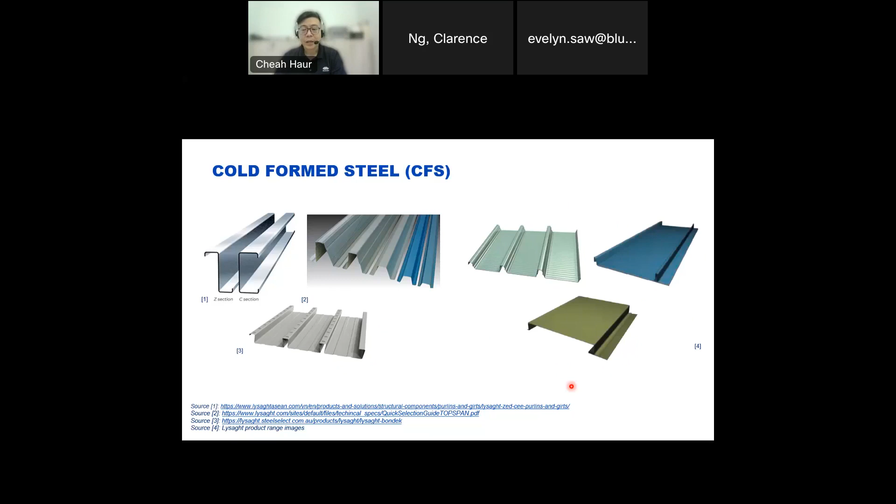On the right-hand side are the cladding products, or what we normally call architectural products. The steel thickness may range from 0.42 mm to about 0.6 mm. Our focus for today is mainly on the architectural products. Commonly, cold form steel is fabricated by the roll forming process in the industry now, because it is the most productive method.

Roll forming is the shaping of the steel coil in the cold state to manufacture long length products, normally done by roll formers in the market. The coil is unwound and passed through a number of pairs of mating profile rollers. Each roller is designed to progressively develop the profile in predetermined increments, gradually bending the flat steel into a certain profile. As shown in the illustration, the coil or flat sheet is fed into a series of rollers, and each roller takes part in bending the steel sheet to the designed profile shape.

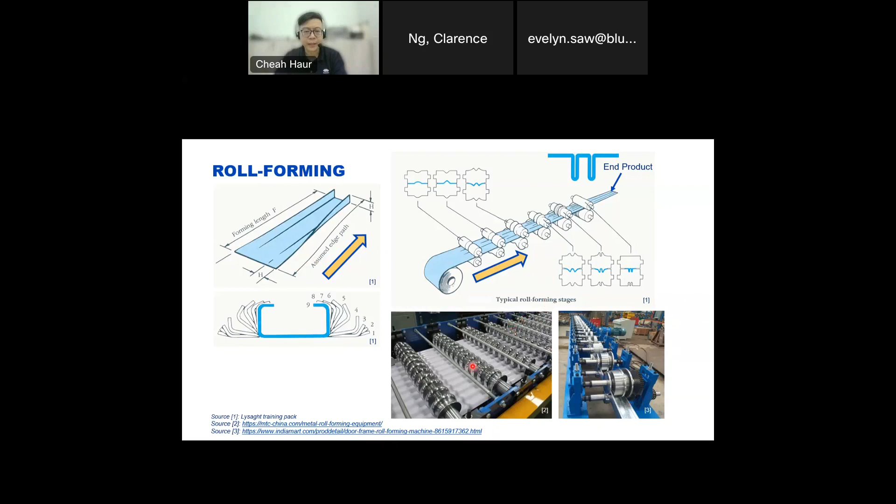At the bottom are some photos showing how roll forming looks in actual life, with all the rollers in series shaping the flat sheet. As I mentioned earlier, cold form steel can be done by rolling, pressing, stamping, bending, etc. So why is roll forming the most popular method? Why don't manufacturers use pressing, stamping or bending? Here are the 5 reasons why roll forming is the best choice to produce cold form sheet products.

First is high productivity. Roll forming is able to produce a high volume of end product in a short period of time compared to other methods. Second is high consistency of the profile. The series of rollers are able to form the shape consistently from the beginning until the product is produced. Pressing, stamping, or bending may involve a lot of manual work, so the possibility of human error is very high. Third is the lower cost of labor and material.

Why? Because as mentioned earlier, we might need more labor to be involved in other methods. So because more manual work is involved, there may be more wastage also.

All right. Then point number 4, which is the most important: the ability of producing long continuous lengths. So in roof and wall design, normally we prefer to have a long length, and the reason is very straightforward: because we try to reduce the joints as much as possible. More joints may increase the possibility of water leakage also, right?

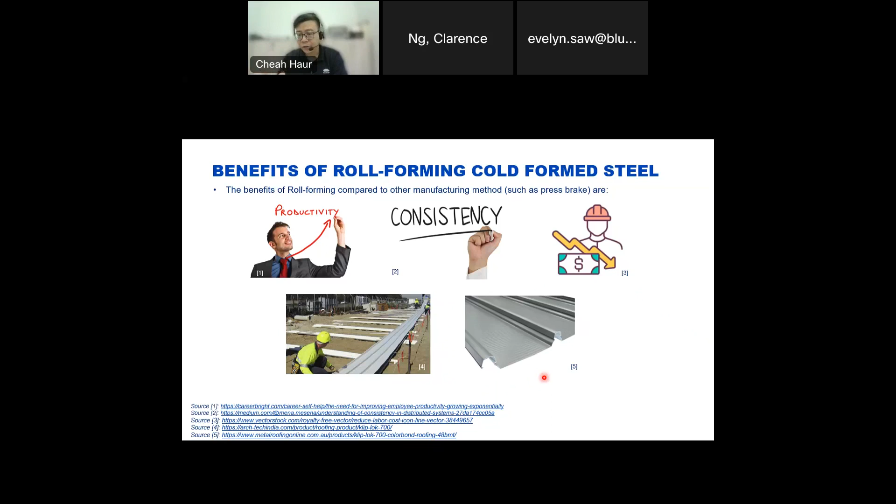So that's why the long length roof is very important, and to produce the long length roof with consistency of the profile, the only method we can adopt is roll forming. And lastly, roll forming is able to produce a complex profile, which pressing, bending, and stamping cannot do. A complex profile will create more room for the designer, for the imagination in the building design, right?

So I believe all of you should know the function of CFS roof and wall products, right? And I think most of you may answer that CFS roof and wall products are the cladding to encase the envelope of the building, right? However, if we ask ourselves in detail, do we really understand what is important for the product and system performance of CFS roof and wall? Maybe all of us have different answers, right? So therefore, I hope that I can give you a short answer on what we should really focus on for the product or system performance when we deal with CFS roof and wall products in the project.

Okay, basically, we should separate the performance of CFS roof and wall into product performance and system performance. So what is the difference? Product performance is mainly focused on the mechanical properties of the CFS roof and wall sheeting, for example as shown in the bottom left here. All right, just the sheeting itself. Okay, this is called product performance.

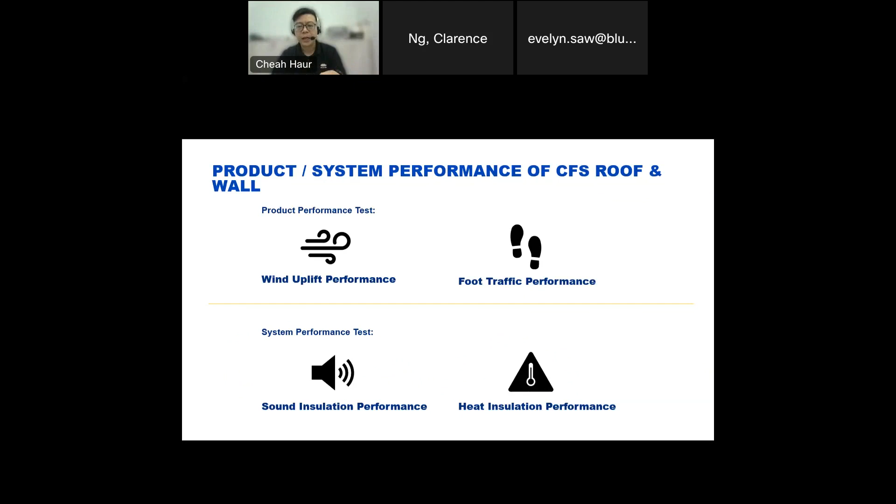Then regarding the system performance of CFS roof and wall product, we shall carry out sound insulation performance tests and heat insulation performance tests to ensure the built-up system matches the design requirement. So I will share the detail of these 4 performances and how to assess them in the following session.

Okay, let's start with the CFS roof and wall product performance and how to assess it. So before I start, I would like to emphasize it again. The product performance is mainly focused on the CFS roof and wall sheet, which is as shown in this slide. So mainly for the sheet only. It's not about all the content inside. Okay, let's start with how we assess the mechanical properties of the CFS roof and wall sheet in terms of the wind uplift performance. Different building types require different wind uplift performance. For example, warehouse and factory might need a similar wind uplift.

Sorry? Yes, you're back, Cheah. You're back. All right. Okay. So should I just go back to the previous slide? Or I think previous slide, just now we got stuck in the previous slide. No problem. Thanks, yeah. No problem. It's okay. Okay, let's start with this section again. So sorry on the technical.

So, okay, let's start with the CFS roof and wall product performance and how to assess it. So before I start, just to emphasize that the product performance is mainly focused on the CFS roof and wall sheets, which is as shown in this slide. So mainly it's talking about the CFS roof and wall sheeting. It's not talking about content or other properties. It just focuses on the CFS roof and wall sheet only, all right?

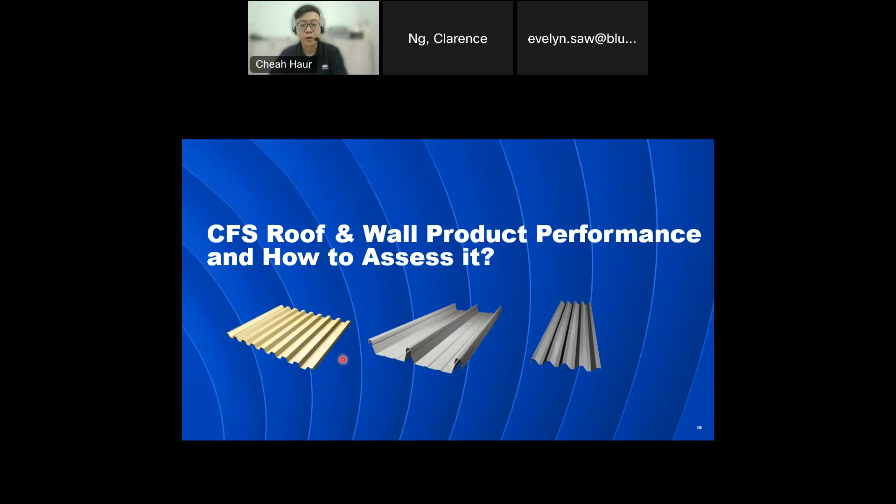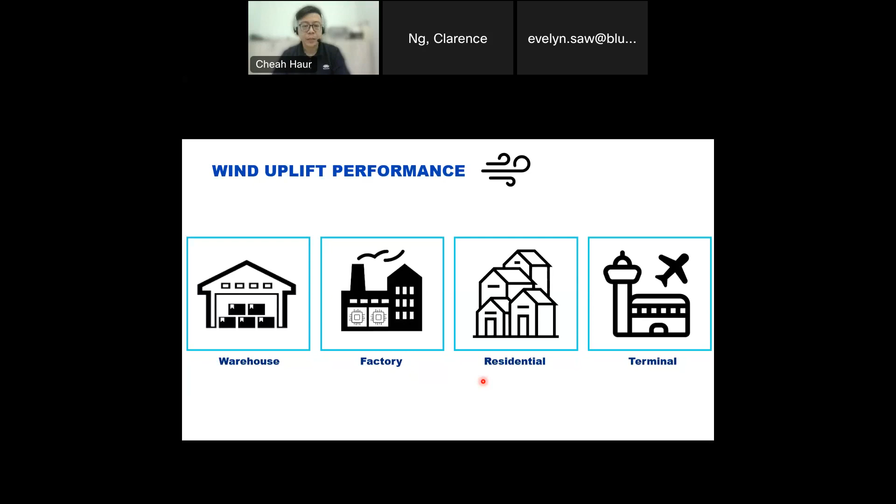Okay, let's start with how we assess the mechanical properties of CFS roof and wall sheet in terms of the wind uplift performance. So different building types require different wind uplift performance. For example, warehouse and factory might need a similar wind uplift performance on the CFS roof and wall, but residential maybe requires a little bit lower performance, and terminal maybe needs the highest performance in terms of the wind uplift performance. All right.

So before we talk about the CFS roof and wall wind uplift performance, let us understand the criteria to determine the wind uplift intensity on the roof and wall. Okay, in layman's terms, it means what are the main factors that may create different wind load levels on a building. So I would like to give a little bit more detailed explanation about wind load. It is the load from the wind when it blows on the building and applies onto the roof and wall sheet and tends to disengage the roofing sheet from the building or from the structure. So this is called wind load.

Right, so the main factors that determine the wind load on a building are whether the building is located in an open field, is the building located on a high terrain or low terrain, is the building designed with a big volume or small volume, and is the building designed with a lot of openings or with a confined area. So the wind load on a building envelope will be higher if a building is located in an open field, high terrain, big volume, and confined area, right?

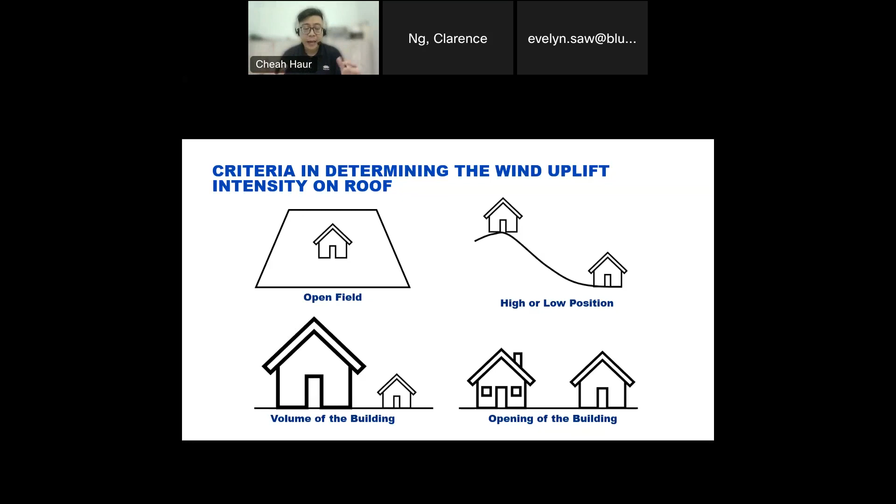Right. Therefore, different building types might have different wind loads on the building envelope. For example, a terminal is normally in an open field and has a big volume and confined area, so it might have a higher wind load compared to other buildings. Whereas factories and warehouses might have a lower wind load compared to a terminal; although designed with big volume, they are not located on an open field and might have more openings than the terminal.

Then lastly, residential might have the lowest wind load compared to terminal, factory, and warehouse because it is designed in a small volume with more openings, unless it is located on high terrain or an open field. So generally, the wind load will be calculated by the engineer based on the local design standard, and then the builder will construct the building envelope according to the requirement.

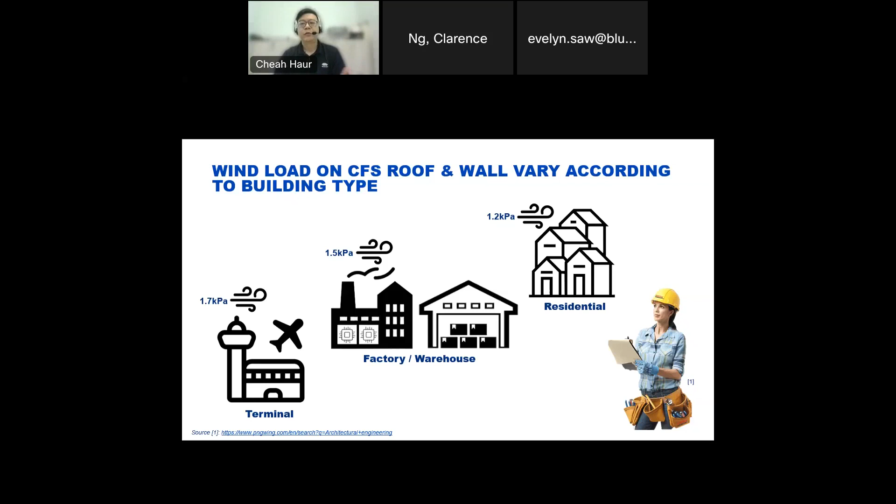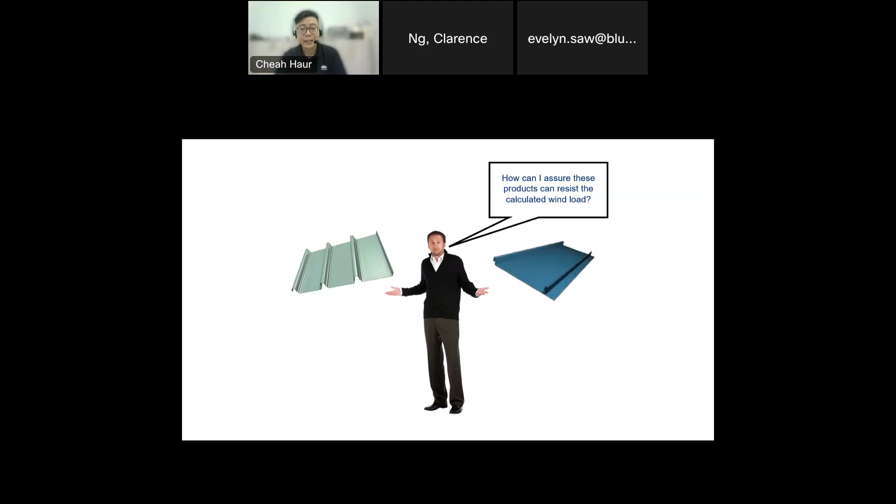All right. So no matter which position you are in the industry, either the builder, architect, engineer, or even the homeowner, when a manufacturer or supplier submits their product catalog and recommends a few products to you, how are you going to assure the products are able to resist the wind load calculated by the engineer? Or which product is the best? In order to answer the question, let's explore the local requirement MS 2500, or Malaysian Standard 2500.

So refer to MS 2500, clause 4.3.2, calculation and test of mechanical resistance. It states the requirement of wind uplift of the CFS roof and wall. These are very lengthy sentences in this clause, but I will not go through in detail word by word, sentence by sentence. I will just pick up the answers already highlighted in the green line. So refer to the first green line, which is point 1.

The clause allows the user to do calculation or testing to verify the wind uplift performance of CFS roof and wall products, either by the national regulation or MS EN 1993-1-3. The national regulation means MS 2523, mainly focused on testing, but MS EN 1993-1-3 is mainly on CFS design, right?

Then refer to point 2. The clause states that no matter whether the calculation or test method is used, it mainly deals with trapezoidal or sinusoidal sheets, as illustrated at the bottom left here. Those corrugated wavy profiles are categorized as trapezoidal or sinusoidal sheets. In other words, all screw-fixed corrugated product performance must be verified either by calculation or testing. However, refer to point 3.

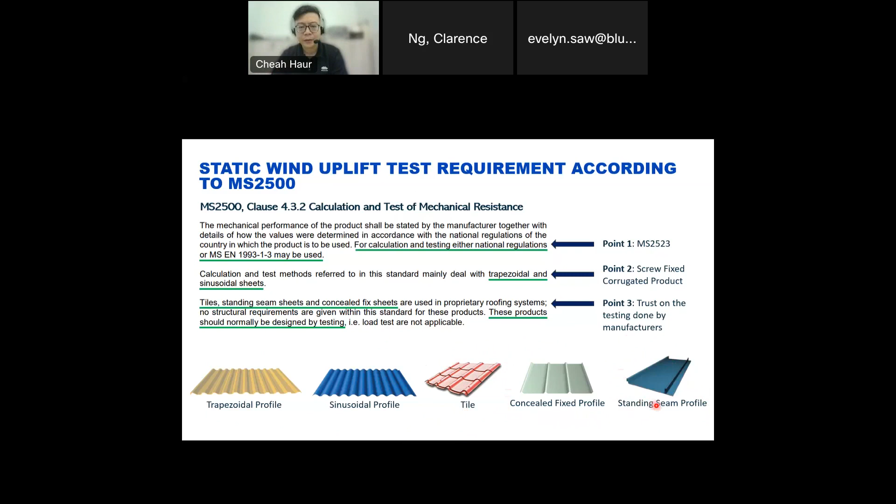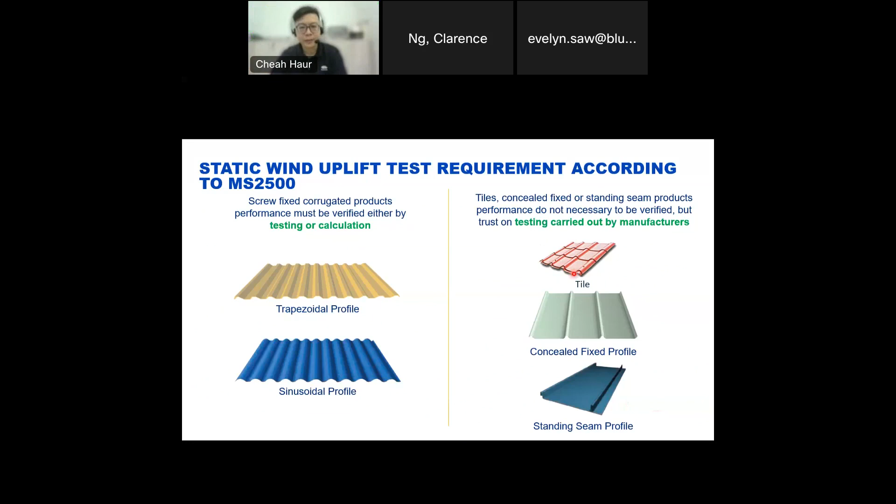Right? So in summary, according to Malaysian Standard 2500, for screw-fixed corrugated products, either trapezoidal or sinusoidal profile, the wind uplift performance must be verified either by testing or calculation. All right, these are all the profiles that must be verified by either testing or calculation. Whereas tiles, concealed fixed products, or standing seam are to be verified based on tests carried out by the manufacturers.

Okay, now come to the key question. Since MS 2500 allows us to choose either testing or calculation to verify screw-fixed corrugated product performance, which method should we use? And which one is the easiest and more accurate way to get the wind uplift capacity of the screw-fixed corrugated profile? Before we answer that, let us explore how many failure modes can possibly occur on the screw-fixed corrugated product. Right?

Okay, most of the time, players in the industry intend to use the section moment capacity to calculate the section capacity of CFS roof and wall, intending to prove the bending performance. But CFS roof and wall products mostly fail before the product yields. Normally, CFS roof and wall products fail by either connection failure or local buckling. In other words, before the CFS steel reaches the yield stage and fractures,

the profile has already failed. We determine the roofing sheet has failed when the roof and wall is disengaged or local buckling occurs. So in layman's terms, we hardly see any roofing sheet tear off or fracture. Normally when gust wind comes in, the roofing sheet flies away by connection failure or local buckling. As such, the calculation should not just focus on the section moment capacity; the connection calculation and the CFS section buckling failure shall be taken into consideration, right?

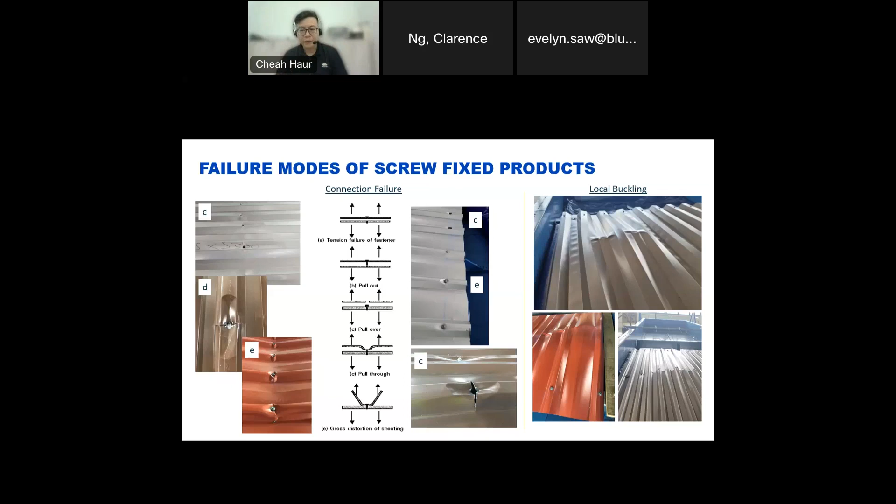So in some cases, local buckling happens together with the connection failure also. In short, there are many combinations of failure modes that may happen to the screw-fixed corrugated product. Okay, now another critical question.

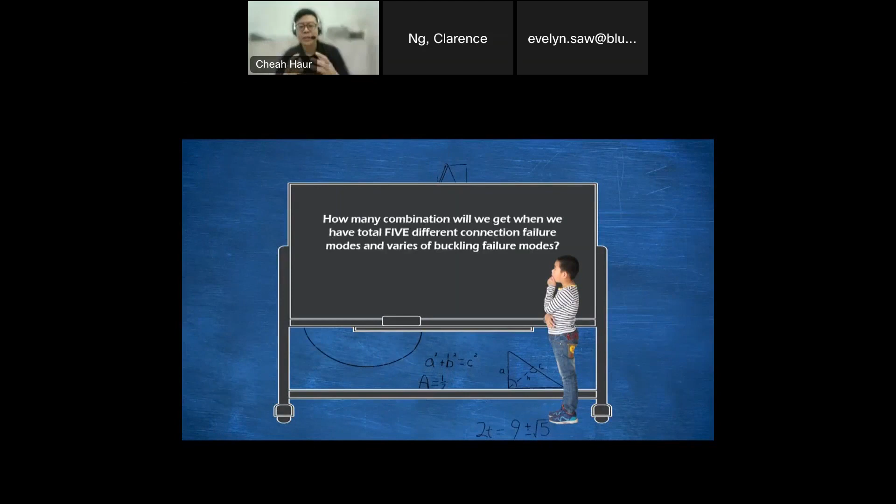Since there are at least 5 different failure modes in connection, plus various buckling failure modes, and these failure modes do not happen constantly—there is a mix of different failure modes in the cases—so how many combinations shall we get based on this assumption?

5 connection failures, and maybe you consider 1 buckling failure mode. So how many combinations? The answer is there may be approximately at least 63 combinations, and this only applies for 1 span type and 1 steel thickness of CFS.

So if you would like to know the product performance for different span types and steel thicknesses of CFS, the 63 combinations must be multiplied by other possibilities. As such, if you would like to verify the product performance by calculation, you may need to do multiple calculations to cover all the different combinations and possibilities.

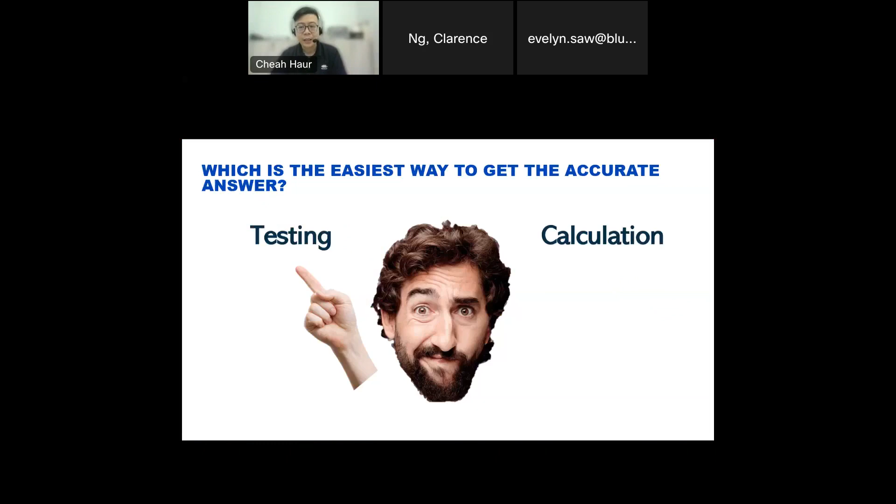So in order to avoid many calculations to cover the combinations and possibilities, the answer to the question is pretty obvious now. Testing might be the easiest way to get an accurate answer to verify the product performance of CFS roof and wall.

And yes, testing is the easiest way to get the accurate result for the wind uplift performance of CFS roof and wall. But how easy is it, and how do we do it? So refer to this slide.

Actually, we can conduct the wind uplift test according to many different international standards. Even MS 2523 has mentioned it, and also AS 4040.2 from Australia, ASTM from America, ANSI, even GB from China, and also UL.

and strength load states. Then after that, we apply the safety factor or reduction factor to the test result according to the international standard requirement. Finally, we determine the product's wind uplift performance and publish the data for design purposes.

I would like to highlight that all the published data, or any data submitted from the manufacturer, the wind uplift capacity is based on the product shape and the base steel thickness, or in short, we call it the BMT. So a change in the product shape or even a change in the BMT will produce a different result.

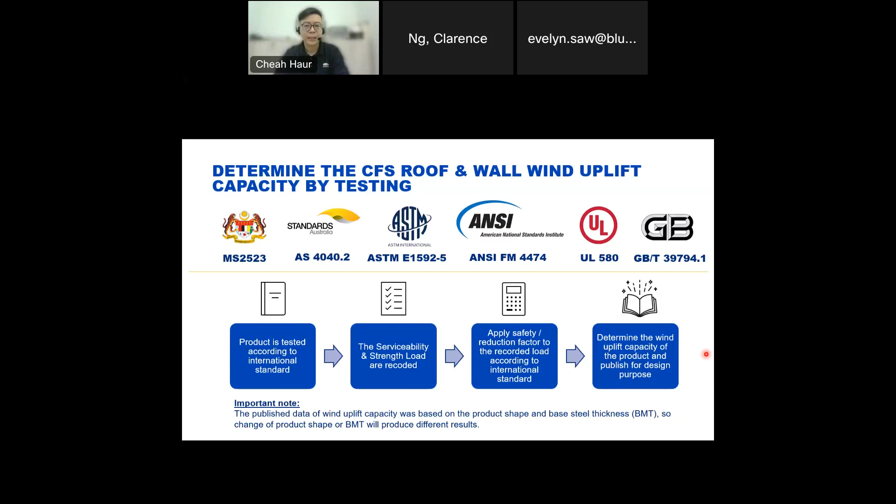Let's explore the recommendation in MS2523 about the wind uplift test. Refer to Malaysia Standard 2523, Clause 6, bending test at mid-span, subclause 6.1 loading, Section A, which gives the reader an open option in how to conduct the test.

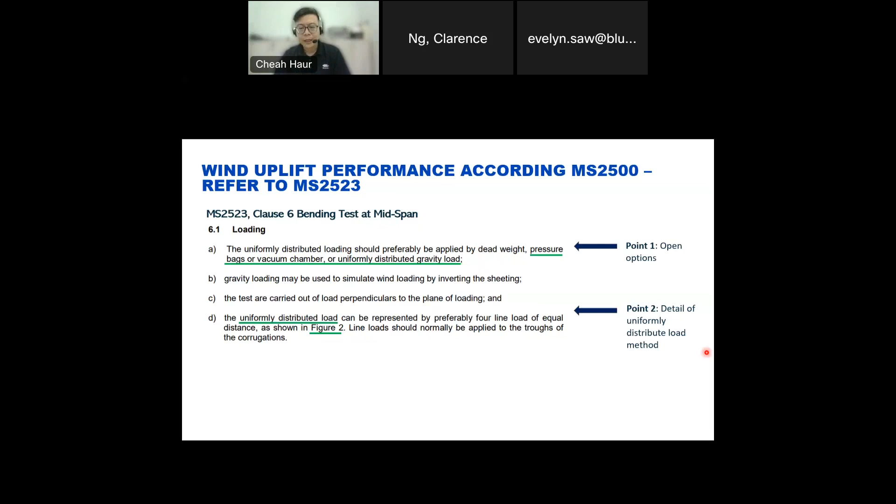The code recommends that the test can be carried out by either pressure bags, vacuum chamber, or uniformly distributed gravity load. Refer to Section D, where the code gives more detail on how to conduct the test if the uniformly distributed load method is adopted.

The concept is very simple: we install the CFS roof and wall onto the support and then apply the uniform load onto the sheet. After that, we assess the performance based on serviceability and strength load, which means we check the performance on deflection and failure strength.

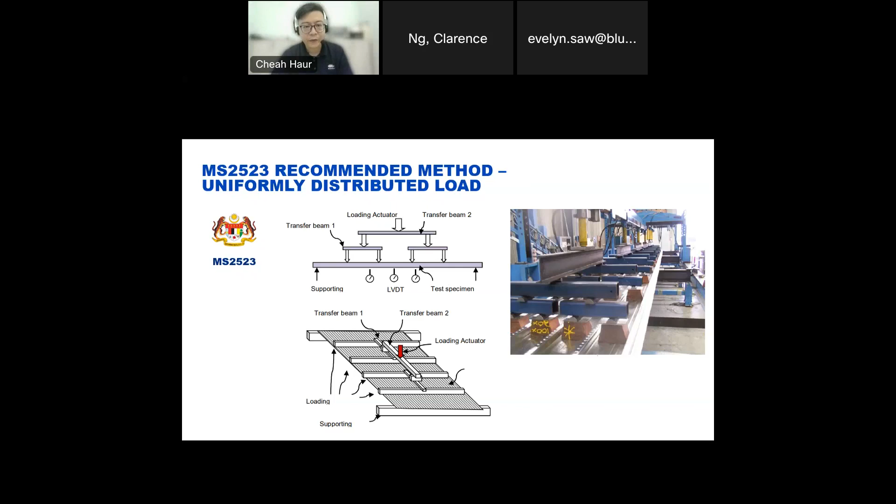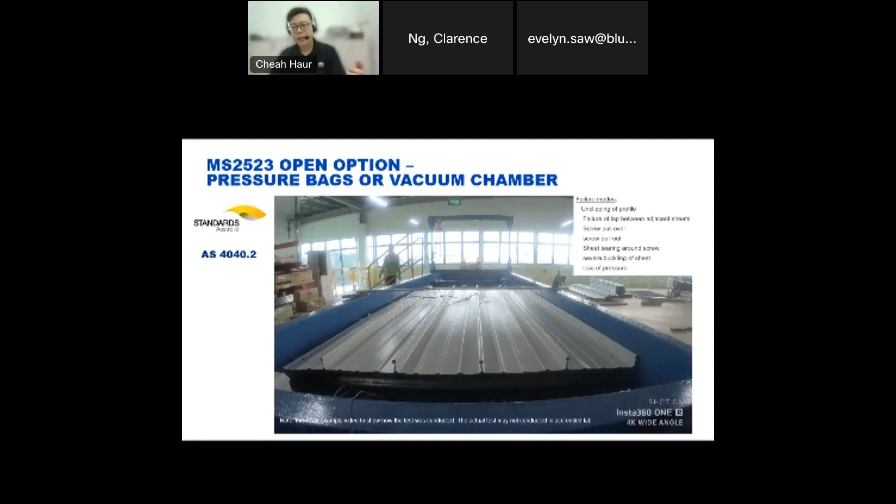Now let's see how the test is carried out using the pressure bag or the vacuum chamber. Since MS2523 did not specify how the test should be conducted, I used AS4040.2 as an example. The CFS roof and wall sheets are installed onto the chamber in the normal way we do on the building envelope.

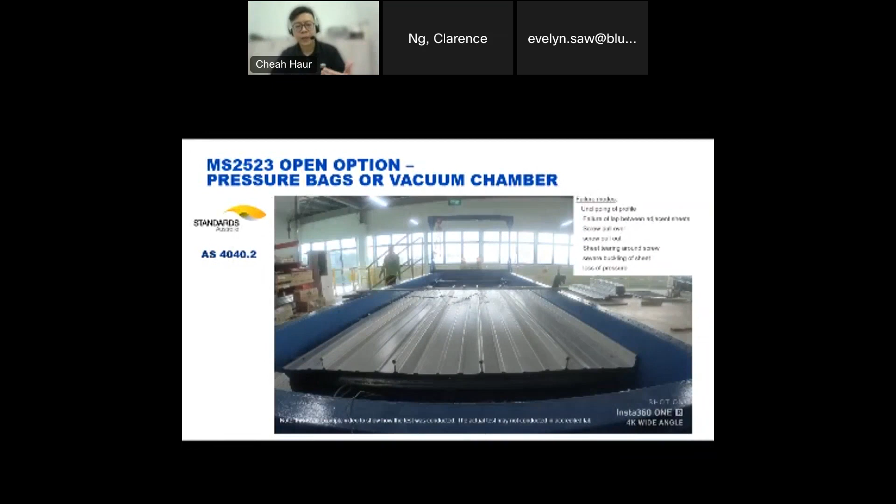We apply direct air underneath the CFS roof and wall so the product receives uniform pressure, then conduct the test similarly to the uniformly distributed load method at the serviceability and strength stage. This video shows the wind uplift performance test according to AS4040.2 in the chamber.

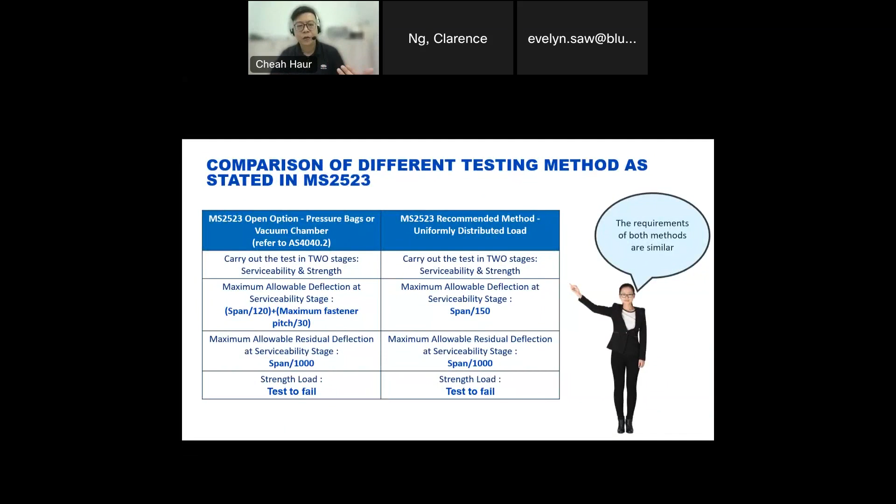Both methods conduct the test in two stages: serviceability and strength. The main difference is in how the deflection limit is determined. In AS4040.2, they first calculate the deflection limit as span over 120, plus the maximum fastener pitch divided by 30, and this becomes the deflection limit to be set. But according to MS2523, the serviceability stage deflection is based on span over 150.

Both standards require the CFS roof and wall to achieve a maximum allowable residual deflection of span over 1000. During serviceability testing, the roofing sheet will bounce up when blown, and when the air is released, the pan or sheet shall return back, not stay bent. It should return to the flatness at the beginning of the test. They only allow the sheet to deform by span over 1000 — so if the span is 1500mm, you're only allowed to deform 1.5mm.

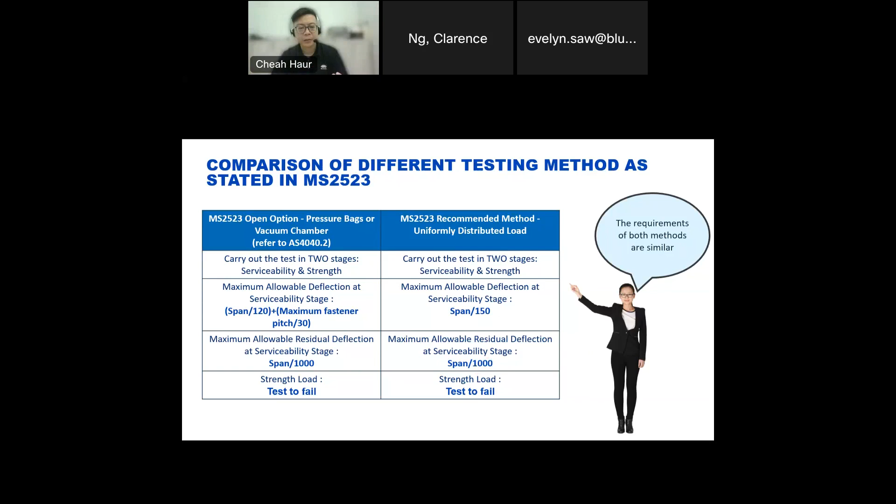Then we carry out the strength load test by testing the specimen until failure — both standards are the same here. So in short, the requirements of these two standards are quite similar.

Let's take a look at another product performance of CFS roof, which is the foot traffic performance. Are there any different requirements for this product performance across different building types? Let's explore it now.

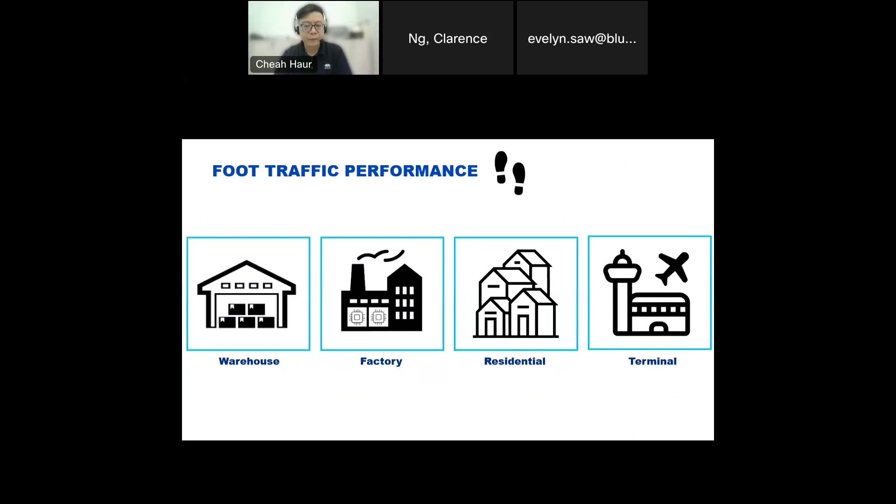Otherwise, the roofing sheet may collapse even before the wind load happens on the roof. As shown in the short video at the beginning, this is a bad example: if you don't check on the roofing sheet performance for foot traffic based on certain purlin spacing, it might be deformed when people step on it, even before the roofing sheet is fully constructed.

The roof foot traffic capacity is an add-on check to the CFS roofing sheet after the support spacing is already determined based on wind load, so there is no difference between building types. In all building types, you need to check the foot traffic load on top. Put simply, whatever building type, whenever you've already designed the roofing sheet according to wind uplift performance, on top of that, you need to check the foot traffic performance. No matter what different requirements apply.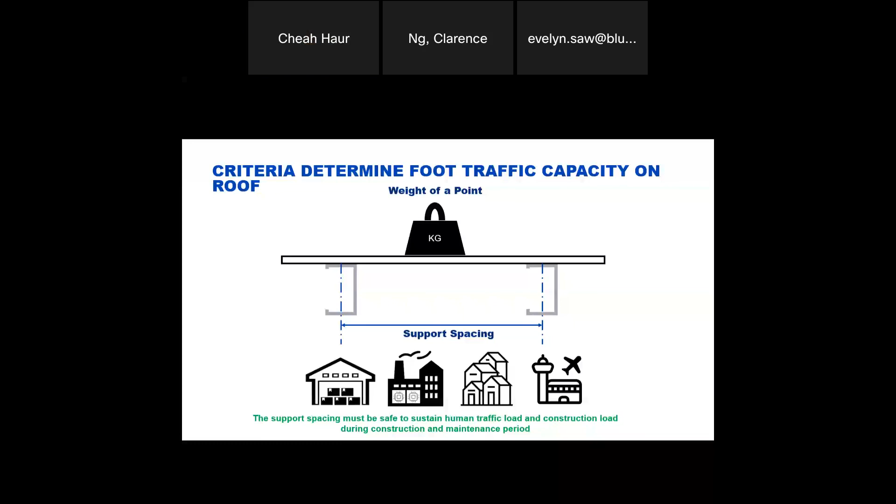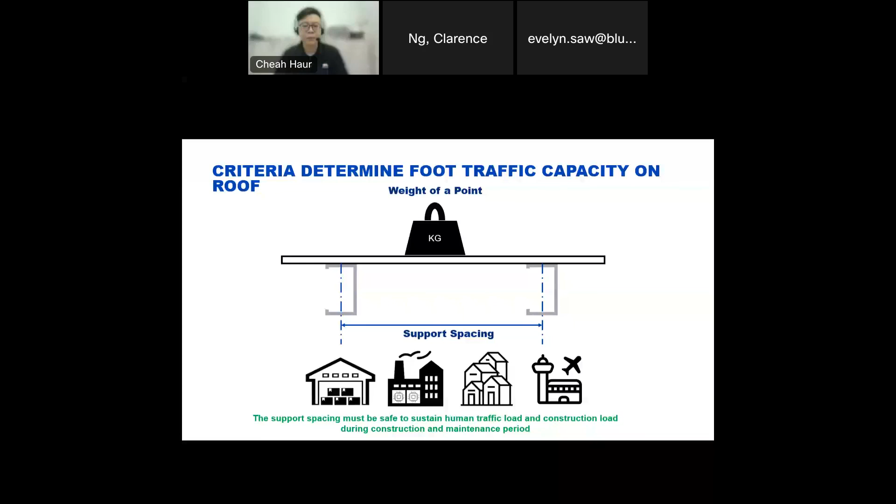Once again, you come to the question: how do you know that the CFS product you use is safe to support human traffic load based on a certain support spacing? In order to answer this question, let's explore the local requirement, Malaysia Standard 2500 again. Refer to MS 2500 Clause 5.2, Mechanical Structural Properties.

It states the requirement of the foot traffic capacity of CFS roof. Once again, I will not go through it word by word, sentence by sentence. I will just highlight the important parts in green. Refer to point 1: the concentrated load capacity of roof product must be determined by referring to MS 2523.

Then point number 2, we give another option. This is an open option given to the manufacturer. The manufacturer is allowed to use other methods, but must state it in the document, what standard was used and how it was done.

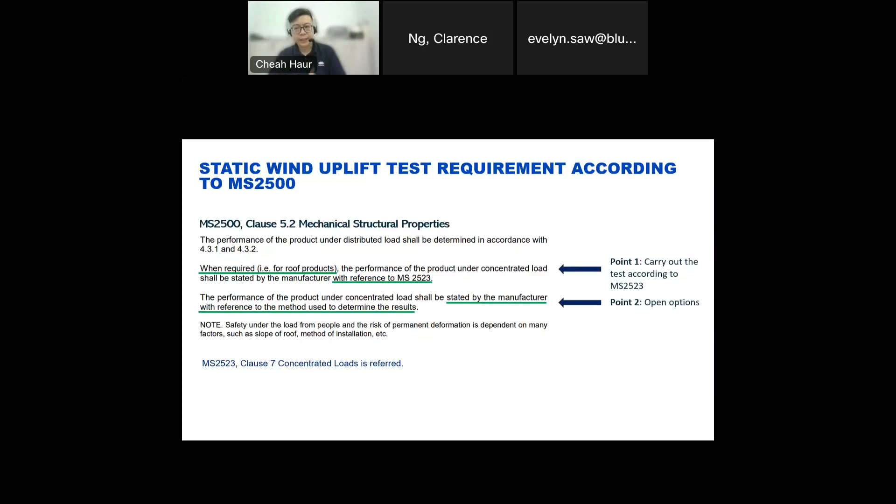So here are the two international standards that can be used to assess the foot traffic performance of CFS roof: of course MS 2523, and the other one we recommend is AS 4040.1. Actually both standards share a similar testing procedure. Refer to the workflow here.

Step one, as described just now in the wind uplift performance, we set up the testing according to the international standard, and then we apply the serviceability load. This is different from wind uplift performance - we first apply the serviceability load, then check the deflection. Once the test passes the serviceability load, only then are we allowed to move to the next step to assess the strength load by applying higher loading onto the roofing sheet.

Then lastly, we determine the effective span length that can support the human traffic load or construction load, and then publish it for design purposes.

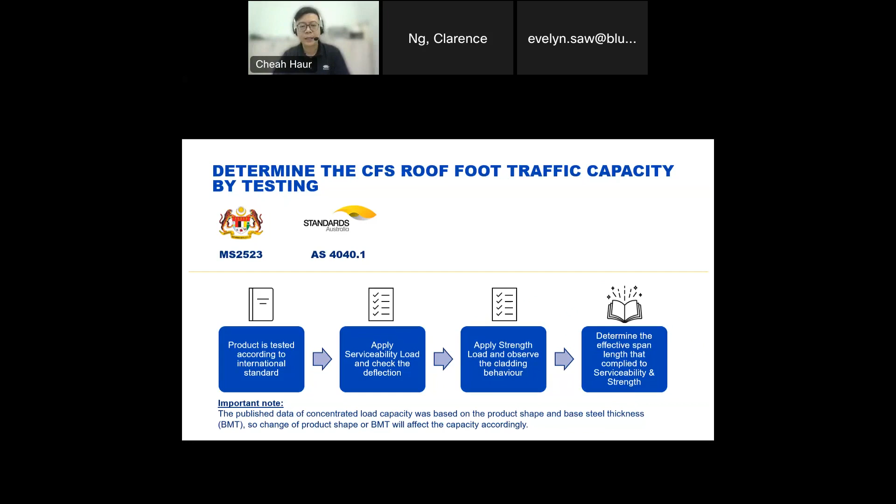So once again, as I highlighted, no matter which manufacturer supplies to you, you must assess how they came out with the result, the test report or calculation. Once they commit on the profile and thickness, this should be able to resist foot traffic using the CFS roof and wall. However, if someone submits another product to you which looks similar, I think you better get the test report to verify whether it complies accordingly.

I would like to show you an example of how the concentrated load test is conducted, referring to AS 4040.1. First, we set the deflection gauge underneath the roofing sheet. So underneath this roofing sheet, there's a deflection gauge. Then we apply the point load - this is the point load, right?

We use a hydraulic jack to apply it until the loading achieves 924 Newton. 924 Newton is equivalent to 92.4 kg, which is an adult human load - imagine an adult human standing on the roofing sheet with one foot on it.

We must at least pass this as serviceability. When we achieve 924 Newton, we hold it for 1 or 2 minutes, then see whether the roofing sheet returns to flatness. If it returns to flatness, that means it passed the serviceability test. Then we check the residual deflection, whether it complies with span over 1000. Once the serviceability is confirmed to pass the requirement, we go through the strength load test.

Strength load is we will apply the loading up to 2475 Newton, which is 247.5 kg for 1 point load, to ensure that the profile can take the certain load and then back to the flatness again. So if it is back to the flatness, then you deem that this profile has passed the serviceability and strength load.

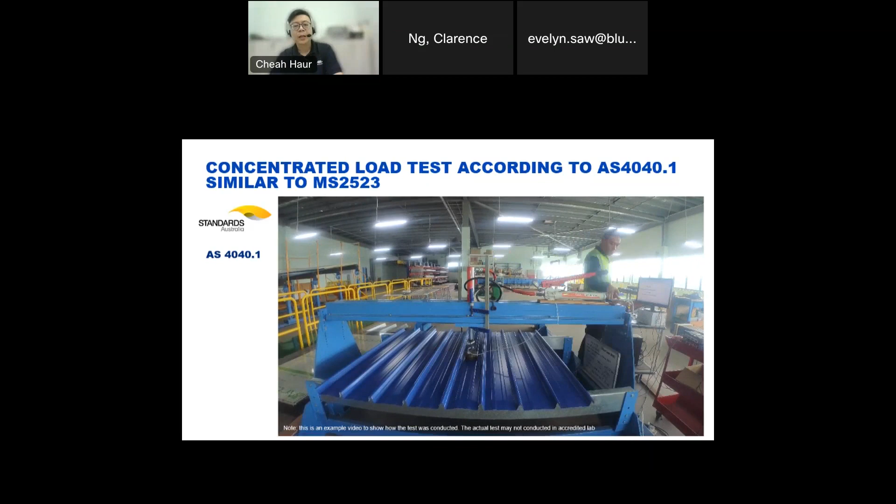Right, in comparison of 2 testing standards, which are the AS 4040.1 and MS 2523, both methods share the similarity of the testing principle. However, if you refer in detail, AS 4040.1 is more stringent than MS 2523. Refer to the summary table. Both standards carry out the test in 2 stages, which are the serviceability and strength. However, AS 4040.1 requires the point load applied to the testing specimen to be higher compared to MS 2523.

The serviceability load is 0.25. Oh, sorry, there's a typo here. Okay, so there's 924 Newton, which is 0.924 kilonewton, compared to MS 2523, which is 0.9 kilonewton, so AS 4040.1 is a bit higher in the serviceability load requirement.

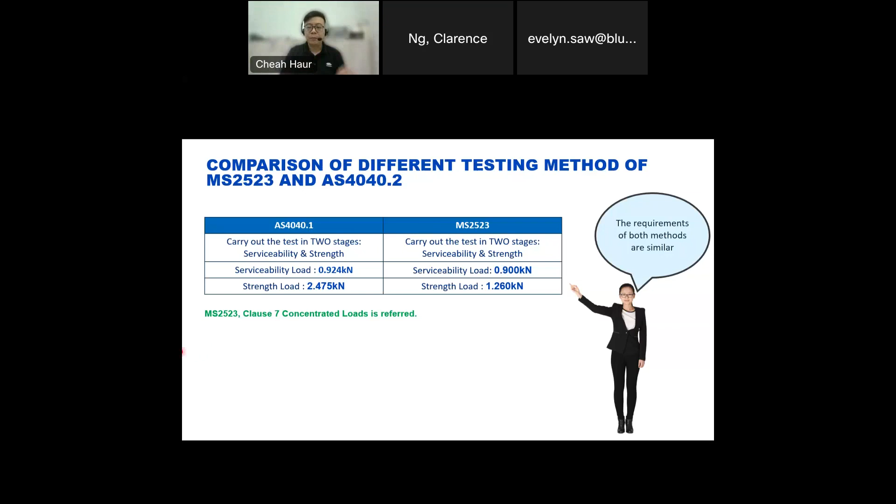And the most difference is coming from the strength load. AS 4040.1 requires the strength load to be almost double the MS 2523, which means the strength load has to achieve 2.475 kilonewton, whereas MS 2523 is just required to achieve 1.26 kilonewton. All right. So in other words, if the product can comply with AS 4040.1, it should be deemed to comply with MS 2523 already.

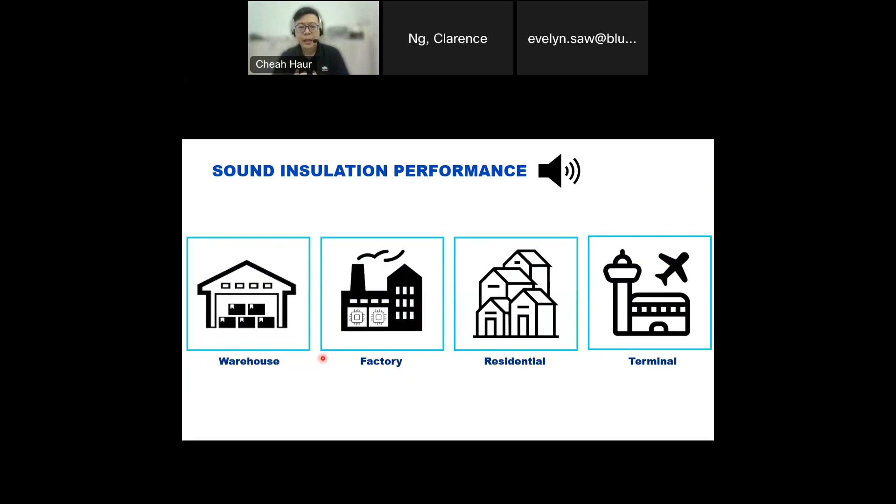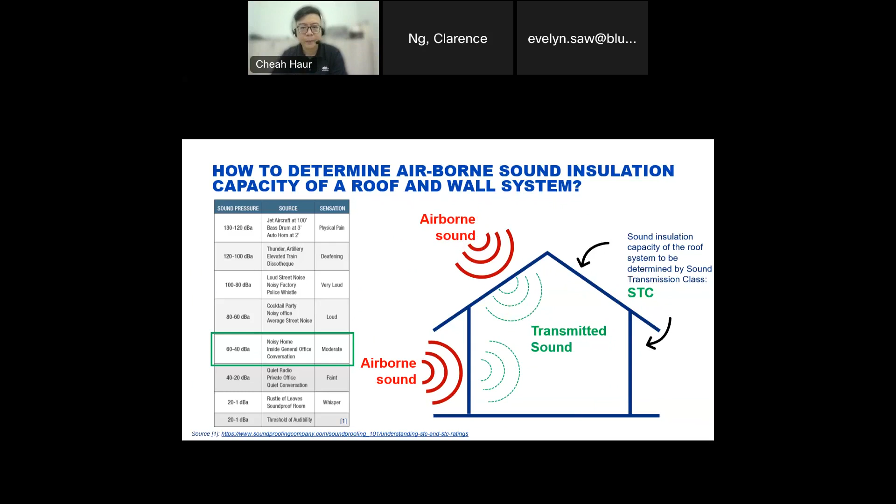Okay, now we know STC is the way to measure the capacity of the airborne sound insulation of a roof and wall built-up system, right? But how does it work and what are the criteria to determine good or bad performance in STC? Normally, when we talk about the built-up system, as I mentioned in the beginning of this session, it means that there are multiple layers of components that combine and serve the function as a whole system. The components include different insulation layers, such as mineral wool, glass wool, cement board, gypsum board, etc.

So the performance of the insulation layer in sound insulation depends on the density, thickness, and number of layers. I repeat again, the performance of the built-up system in sound insulation really depends on the density, thickness, and number of layers that you put into the whole system to insulate the sound. So sometimes, if we would like to achieve higher insulation performance, we will add a cavity, or in layman's terms, an air gap, to enhance the sound insulation performance.

So I hope you already capture how the built-up system provides different sound insulation performance based on different combinations of the components and with or without the air gap. So now let me share how the whole built-up system works in sound insulation. When airborne sound from the outside passes through a built-up system, the sound level shall be decreased when it comes to the inside. However, how do we measure the capacity of the built-up system, right?

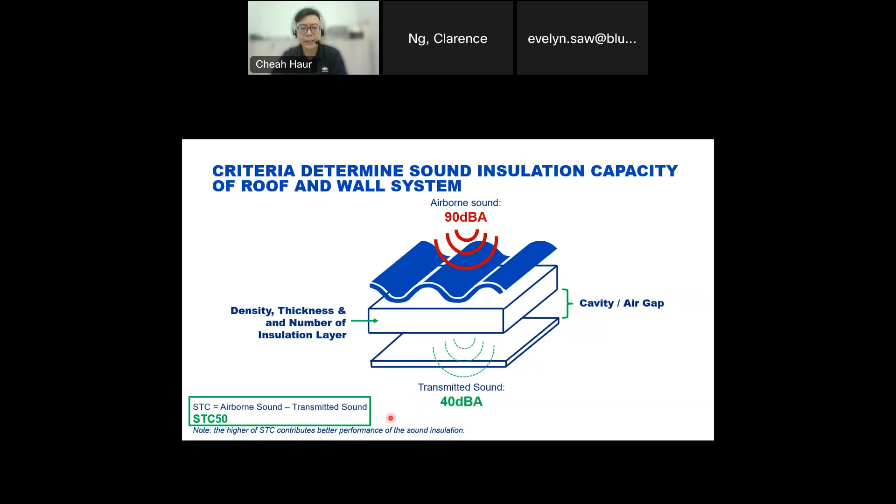So very straightforward: you use the sound source to minus off the transmitted sound, then we define what is the capacity of this built-up system. So in this built-up system, with 90 dBA coming to 40 dBA, we define it as STC 50. All right? Right, how is a built-up system capacity to be determined?

So the way I described in the previous slide is very general, and this is not the proper way to assess the capacity, because the result will fluctuate from time to time. So we should determine the sound insulation capacity of a built-up system based on the international standard, and it should be tested in a controlled environment lab. So in general, there are two international standards, or maybe more, that we frequently see in this region, which are ASTM E90 or ISO 10140-2.

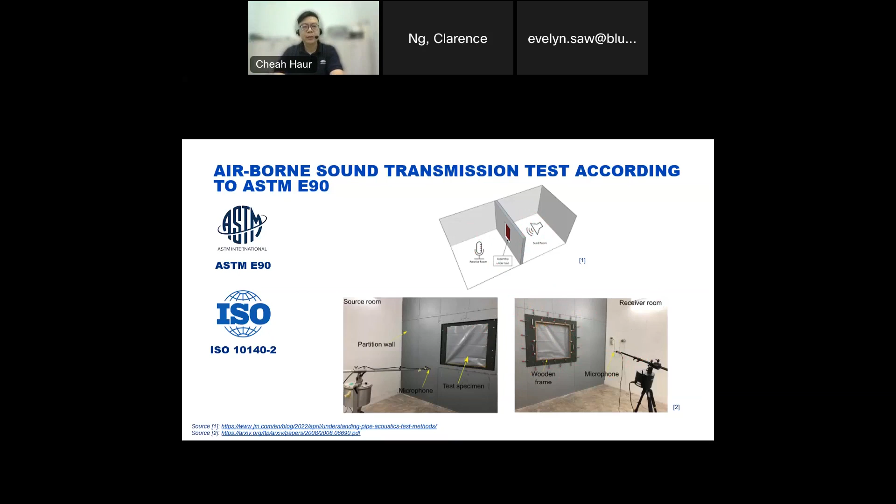The concept or the principle of testing is very simple. We just mount the built-up system onto the void, which is shown in the black frame here, on this so-called soundproof wall in gray color here. And then we create a sound source from one side of the wall, and we receive the sound from the other side. Then we can determine what is the STC level of this particular built-up system.

Okay, so we know what STC is for a built-up system and we know how to assess it. So what are the requirements for different building types? So in general, here is the basic requirement based on the different building types. For example, factories and warehouses may require a lower STC level because the transmission of airborne sound from outside to inside the building may not affect the comfort level of the people who stay inside, right? So as such, the requirement ranges from about STC 25 to maybe 40.

However, residential buildings may need higher STC on the built-up system because residents in the building require a higher comfort level. The reason is very straightforward: they need good rest and leisure, so they need a higher STC level. So normally we're talking about maybe STC 45 to 55 for residential.

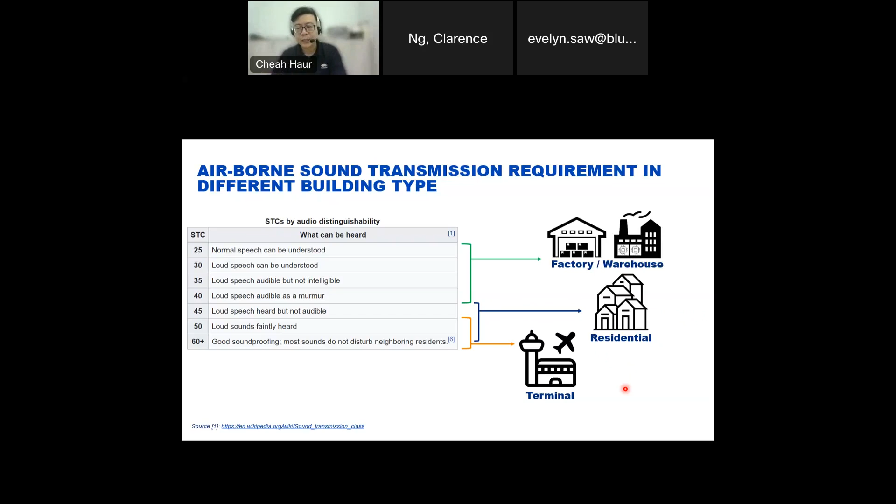Regarding terminals, the surrounding sound is extremely high because of airplane takeoff or landing, which is about 75 to 85 dBA, and also a lot of heavy vehicle transportation. So the STC requirement for a terminal may be higher than others. It's about STC 50 to maybe 60 plus.

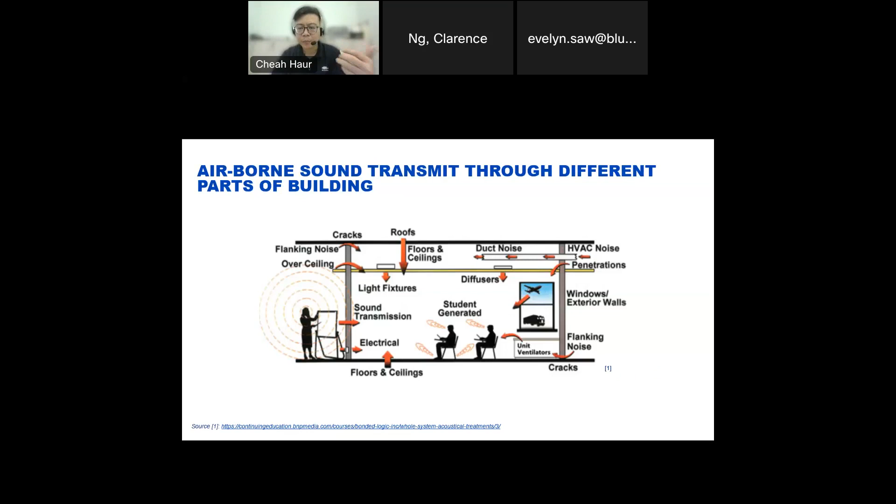However, just to highlight that, although the CFS roof and wall built-up system plays an important role in the sound insulation of a building, we cannot ignore the transmission of airborne sound from other parts of the building as well. For example, airborne sound might be transmitted through the windows, ventilation system, internal walls or ceiling, etc. Therefore, we should not solely rely on the CFS roof and wall built-up system to play the sound insulation role, but the other parts of the building should be assessed as well, right?

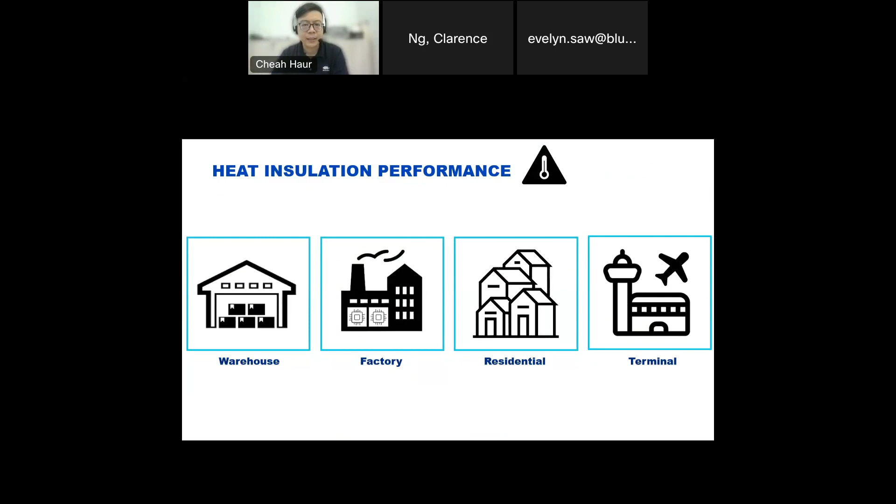Okay, next, let's see the different heat insulation requirements for different building types of CFS roof and wall built-up systems, how to judge the level of heat insulation of a built-up system, and how we can assess the capacity. Okay, the difference between heat insulation of a building and sound insulation is that the main area most exposed to the heat from the sun is the roof rather than the wall. So as such, I will focus on the roof system in this section.

At first, let us understand how the heat from outside of the building transfers into the inner space of the building from the roof. So the heat from the sun is radiation. I think all of you should be aware that it is energy, and we call it a heat flux. When the heat flux or the energy transfers through a built-up system, the temperature from outside should be reduced when it gets into the inner side of the building.

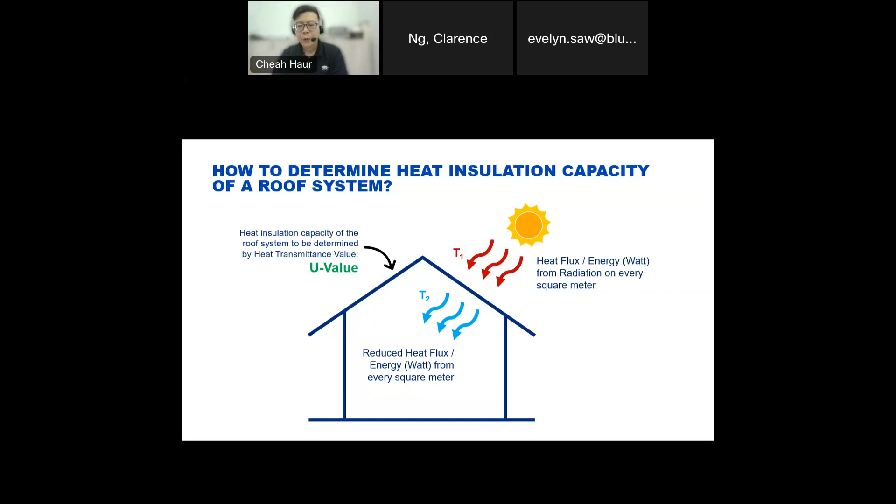So now we understand the theory of the heat transfer via radiation, right? So how do we measure it? In order to judge whether the roof built-up system can perform to the required heat insulation requirement, we base it on the U value to measure the capacity. So how do we measure the U value and what are the criteria to determine the heat insulation capacity of a roof built-up system?

Similarly to the sound insulation performance that I shared in the previous section, heat insulation performance is solely relied on the components and cavity, or maybe you call it air gap, in the built-up system. In addition, the most important component for heat insulation is called aluminum foil. A lot of people maybe ignore it, they think it's a thin layer, but it's very important in the heat insulation for a roof built-up system.

As I explained in the previous slide, the way we measure the heat insulation performance of a built-up system is by U value. So what does U value mean in heat insulation? U value is equal to the reciprocal of the R value. In other words, it is 1 over R. But what is R value? R value is the total thermal resistance of the external surface plus insulation layers, plus the internal surface, and also plus the air gap. In other words, you just combine all the components and any airspace that can resist the heat from outside to inside together. We call it the R value.

So the higher the thermal resistance of the built-up system, the lower the U value of the system. Therefore, the lower the U value, the higher the performance of the built-up system in terms of heat insulation.

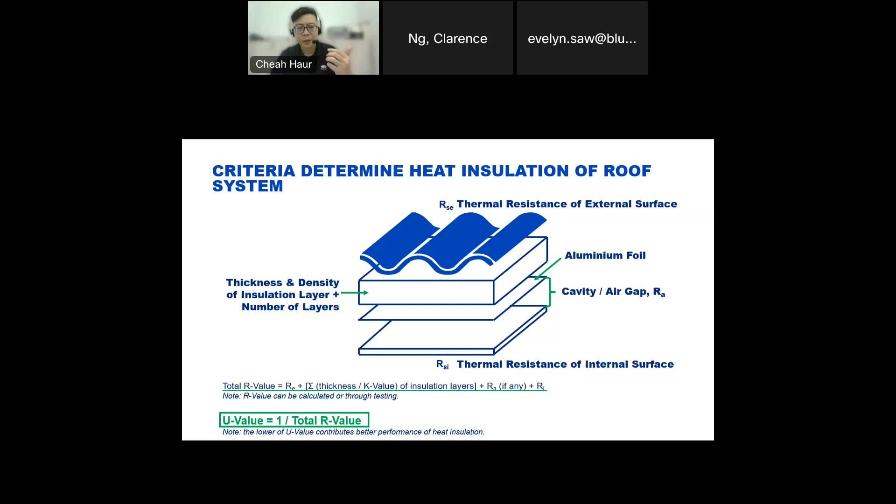Okay, we can test the K value of the built-up system in the lab according to ASTM C518-17, and you can also test it with other methods. But importantly, because the K value is defined by this test, how we calculate the R value and U value is more important. I'll explain later. The testing procedure is very simple: you just prepare the sample.

Some labs just have a small heat flow meter. This is called a heat flow meter, right? Based on the size of the heat flow meter, you have a smaller size, maybe 300 by 300 mm. You just prepare the whole built-up system, slot it in, and then you assess the heat transfer from top to bottom.

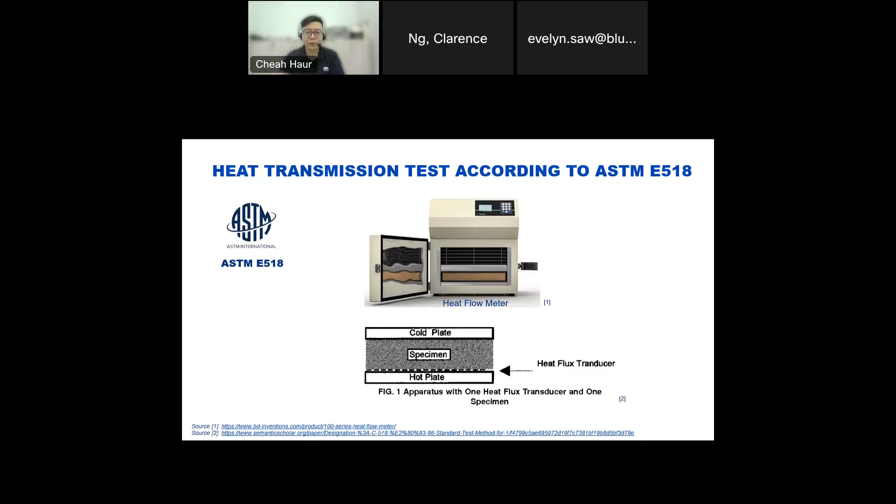So the accredited lab is supposed to produce the K value, and not only that, you should ensure the accredited lab produces the K value, R value, and U value calculation for you according to the local standard. This is very important: you should get the full report of the whole performance, not just the K value.

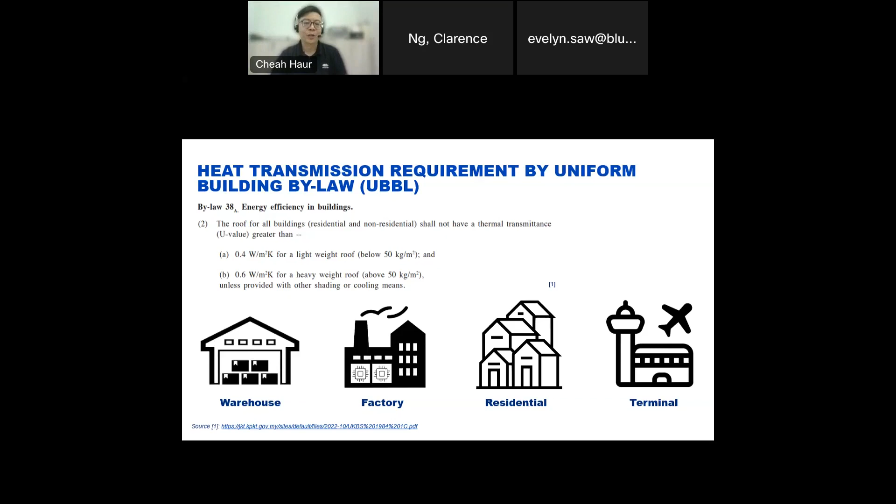Okay, now the same question: what is the requirement of U value for different building types? The answer is, there's no difference in Malaysia, referring to the Uniform Building By-Laws, UBBL, Section 38A. It states that the U value for all types of buildings must be 0.4 or lower if the weight of the roof is lower than 50 kg per meter square. Whereas if the weight of the roof is higher than 50 kg per meter square, the U value for all types of buildings is tolerated to 0.6 or lower. So this is just the basic requirement from UBBL.

However, if you refer to the Green Building Index, there's another requirement for the U value. Before I get into detail, let me briefly explain what the Green Building Index is. It is a guideline for a building owner to get a GBI rating according to the points collected based on certain criteria. If a building owner gets 86 to 100 points, the building will be rated as platinum. If you get 76 to 85, then it's gold. 66 to 75 will be silver.

Then 50 to 65 will be just certified as a green building. However, if you get points lower than 50, then you are disqualified as a green building. Okay, all right, we know about the GBI and how it is rated. Then let's see how the U value of the CFS roof BR system can contribute the points.

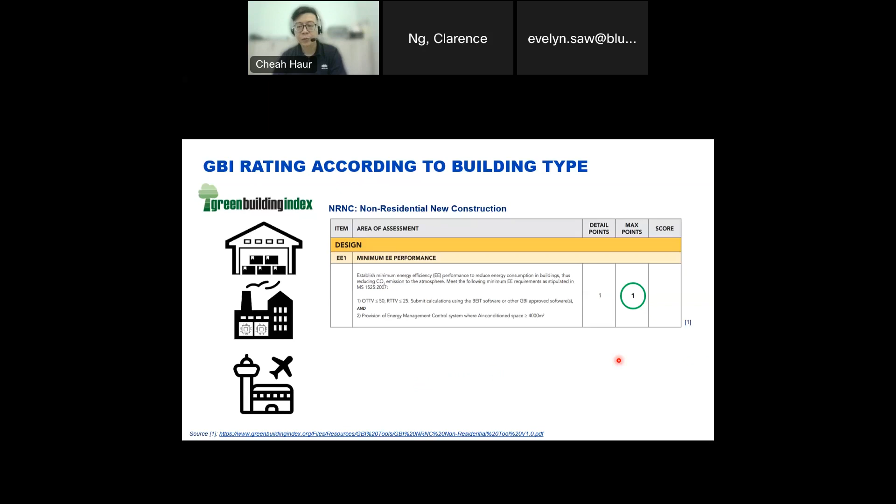Okay, refer to the NRNC, which is non-residential new construction, including buildings like factory, warehouse, and terminal. You will be able to get 1 point as long as the U value of the BR system can help the building to achieve the OTTV, which is the overall thermal transfer value, equal or less than 50, or RTTV, the roof thermal transfer value, equal or less than 25. Then you get 1 point.

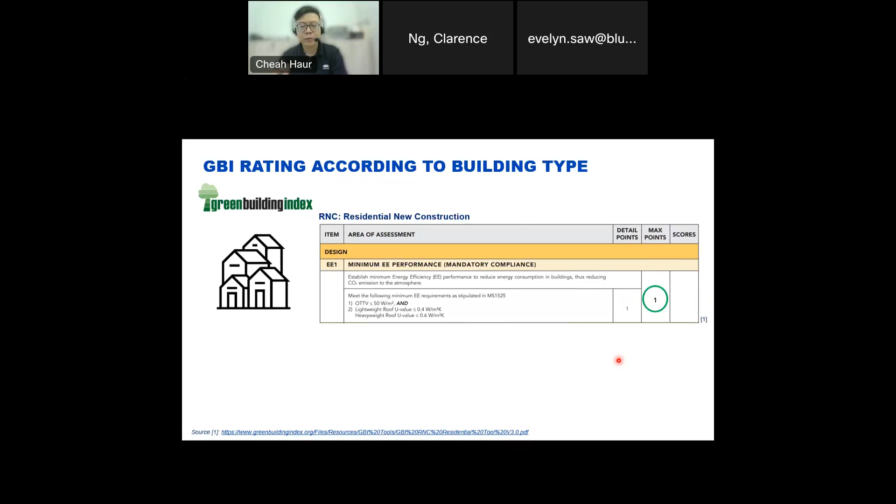If the building type is residential, you will be getting 1 point if the roof BR system can achieve the basic UBBL requirement and help the OTTV to achieve 50 or lower. Furthermore, you can get more points if your roof BR system can achieve lower than the UBBL benchmark, and if you're getting a lower U value, you will get higher points based on the type of residential building, such as landed, low-rise, or even high-rise. Okay, so this is how we gain points in GBI by using the roof BR system, depending on the U value.

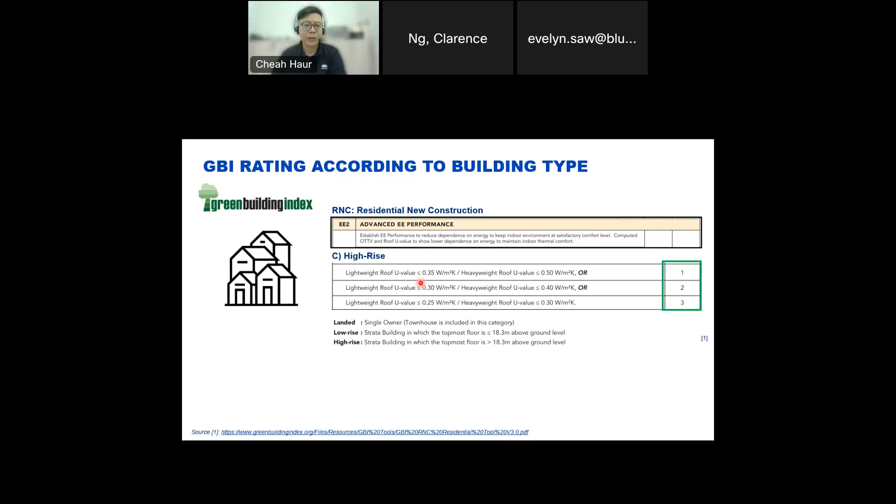Okay, come to here. I hope all of you capture what is CFS, what performance needs to be considered when we use CFS for roof and wall in the project, what tests can be used to assess the performance, and how the performance requirements differ based on the different building type. So we know the product or system performance must be proven, assessed or even tested. And then we said that the test must be conducted by an accredited lab.

So, but what is an accredited lab, right? In general, when a lab is ISO 17025 accredited, it is defined as an accredited lab. So what does it mean? If a lab has ISO 17025 accreditation, it means that the lab has an acceptable quality management, which is quite similar to what we have for other ISO standards like 9001, 14001, etc. However, for ISO 17025, on top of the quality management system, the standard will assess whether the lab has the ability and the competence to provide the testing or calibration result.

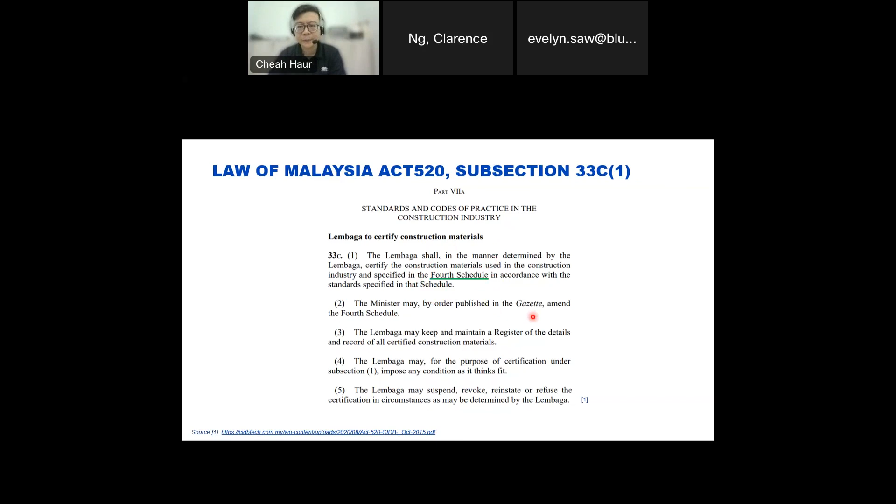It stated that zinc or aluminum-zinc coated CFS products must be tested according to MS 2005. That's why I kept mentioning the MS 2005 testing and requirements at the beginning of the session. This is the reason why. So refer to MS 2005, which I already shared in the previous section. In order to comply with Act 520 subsection 33C(1), we must ensure that the CFS roof and wall product complies with the wind uplift performance and foot traffic performance.

How are you going to ensure the CFS roof and wall product can fulfill this law? The only way is to have it proven by an accredited lab. Once the product is sent to the accredited lab for testing, end users or the designer can ensure the product conforms to the law of Malaysia, right?

With regard to the CFS roof and wall system performance, although this is not part of the mandatory requirement by the law of Malaysia, in order to assure whether the built-up system can comply with your design requirement or your living requirement, I think only an accredited lab can give you a firm answer by conducting the test on the system based on the international standard, right?